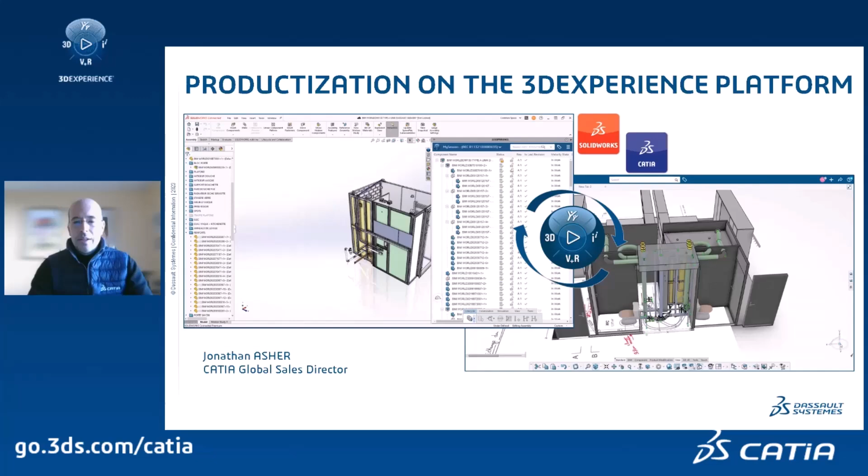And we're going to talk about CATIA and productization for the construction industry. A quick reminder, the pillars of our CATIA construction portfolio and offer are related to these four main subjects: being smart, being modular, being generative, being continuous. Continuous in terms of project development and level of detail, level of development. These pillars all lend themselves perfectly to the productization approach for construction.

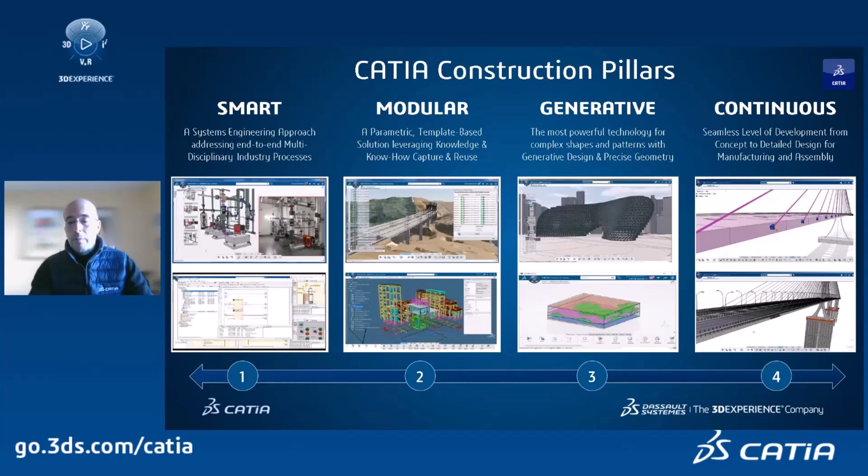And through the use of a systems engineering methodology and approach to construction, creating modular parametric templates that can be reused across projects, instantiating or integrating those modular components with the generative design technology and approach to design, engineering, and construction is a great way to then develop the model continuously over the course of the project through all phases. And they all are then deployed in this productization approach for construction.

And there's a difference between industrialization in construction, which has its roots more in the manufacturing industries, versus productization. When you look at industrialization in manufacturing, we think of automotive and aerospace, industrial equipment, where supply chain is an essential component to optimizing manufacturing. And when we optimize manufacturing, that's great for something like an automobile, where it's a standard assembly of custom components. Every component is fine-tuned and tailor-made to optimize the assembly of that product.

Well, a building is the opposite. A building is a custom assembly of standard components, where these standard components are not optimized for the final custom assembly that's going to be delivered for the construction project. So the modern approaches to industrialized manufacturing are difficult to apply to industrialized construction.

The two approaches just don't mix so well together, which is why productization as an approach to construction lends itself very well to this custom assembly of standard components, because you can take standard off-the-shelf components, you can integrate them into custom generative assemblies, and then build that final product, which is the finished construction, whether it's a building or an infrastructure project, using the same technological bricks that you would for industrialized manufacturing.

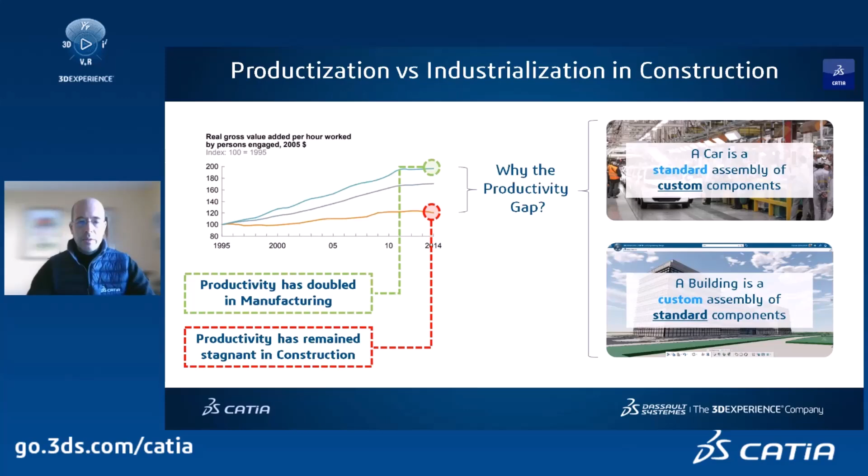So that's the key distinction between industrialized manufacturing versus productization in construction. They share many threads, but there are nuances between the two. And by deploying productization in construction, you can see those efficiency gains that are going to bring construction productivity, efficiencies and margins back up in line with the same types of gains that we've seen in the manufacturing industries since the Industrial Revolution.

What is productization then in construction for CATIA? From CATIA, we see it as a multi-layered approach to developing the 3D virtual construction twin. It starts with standard components that are digitized. Digitized, they're parametric, so they are flexible and able to adapt when a standard component is inserted into a model. From there, you build these parametric assemblies. Parametric assemblies integrate parametric standard components, and those parameters are nested into the parametric assemblies so that you can create another level of intelligence, flexibility, configurability into that component, into that module.

Next up, we have generative modular variants. This is when parametric assemblies are layered together and given a rule-based intelligence, rule-based decision-making inside of them, so that they can adapt, change or modify when they are integrated into the larger model. So the generative module variants are generative modules that can express themselves in different ways based on their configuration.

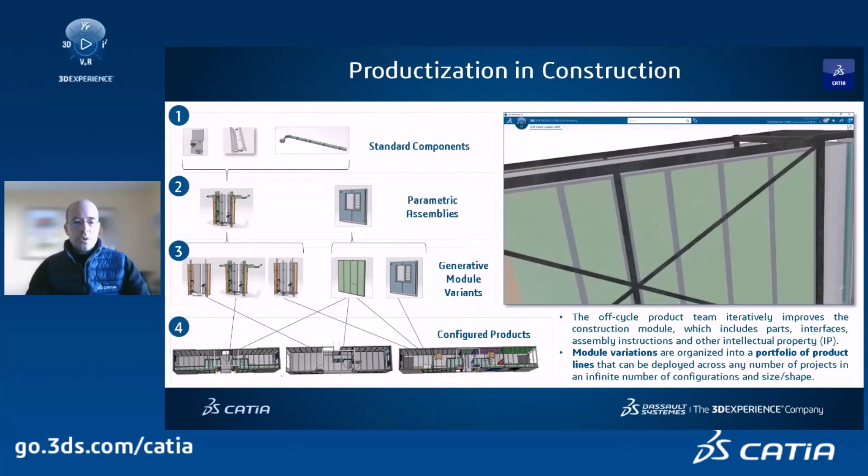Then they're configured into products. So you see, we're building up intelligence, we're layering information. And because all of these components are parametric and generative, they can be configured based on the unique requirements of a project into which they are deployed. So these configured products are essentially expressions of the generative module variants based on the specific project requirements. That's a quick look at productization in construction, what it means for us from CATIA on the 3D Experience platform.

CATIA is a part of the 3D Experience platform. We are one brand of many. Our sister brand, Solidworks, is widely used in the construction industry to develop products, standard components. Here we see an example of a door or a configurable bathroom pod. These are simple components and detailed parametric assemblies developed in SolidWorks that can be integrated into CATIA via the 3D Experience platform to create generative module variants and configured products.

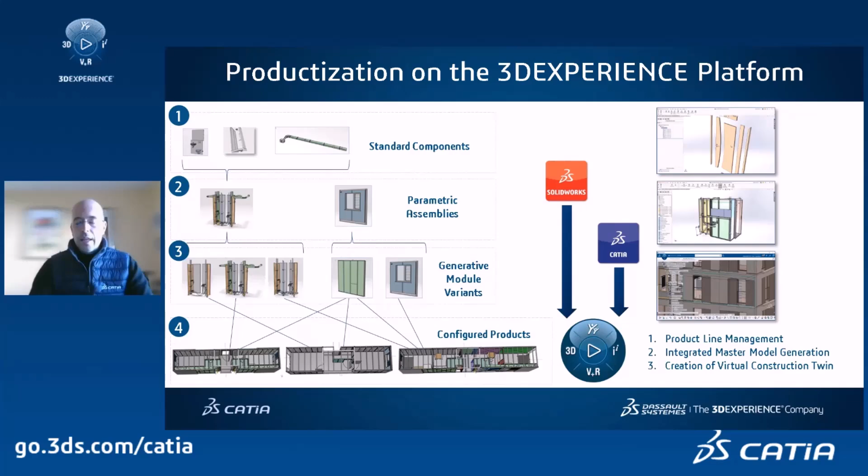And these configured products, when inserted into a larger project, create the construction twin, the virtual construction twin. So now let's look at how that looks in reality. This is an example where we'll launch the project with new SolidWorks connected.

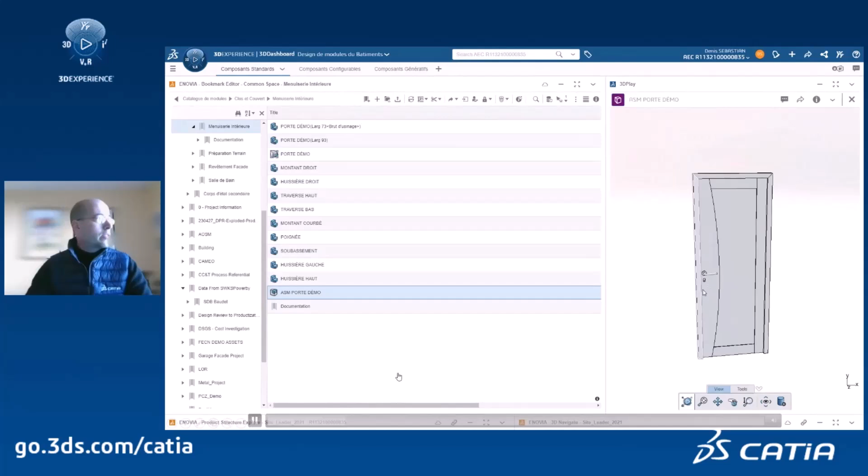You can launch SolidWorks connected to the 3D Experience platform and access all of your SolidWorks models from the platform. You can open them up in SolidWorks desktop. Well, here we're reviewing it in 3D Play to look at the overall assembly. But that model can be opened directly in SolidWorks, where you can make modifications to this standard component.

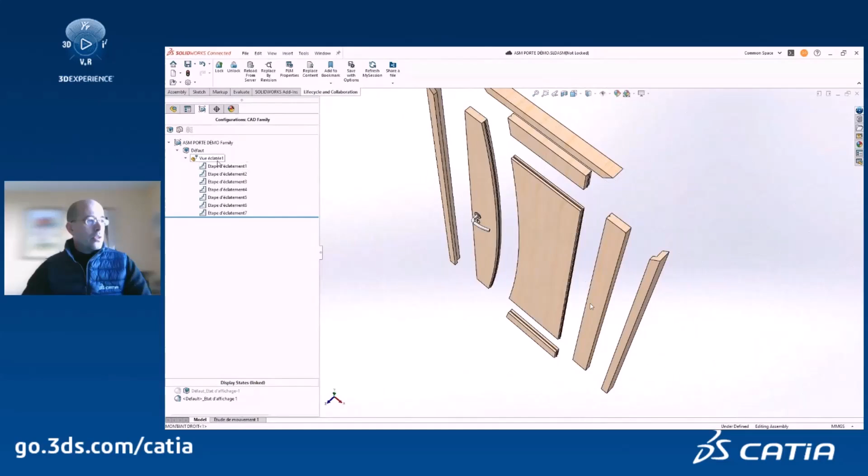This modification, if you want to change the door panel curve or change the door handle or change some of the design lines or some of the manufacturing information with the notches or the cutouts or grooves, you can do that all in SolidWorks. As we see here, this SolidWorks model is saved to the 3D Experience platform.

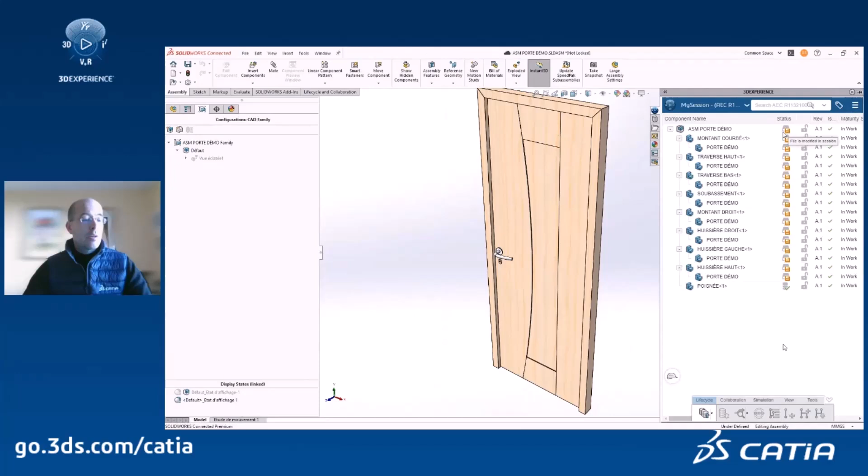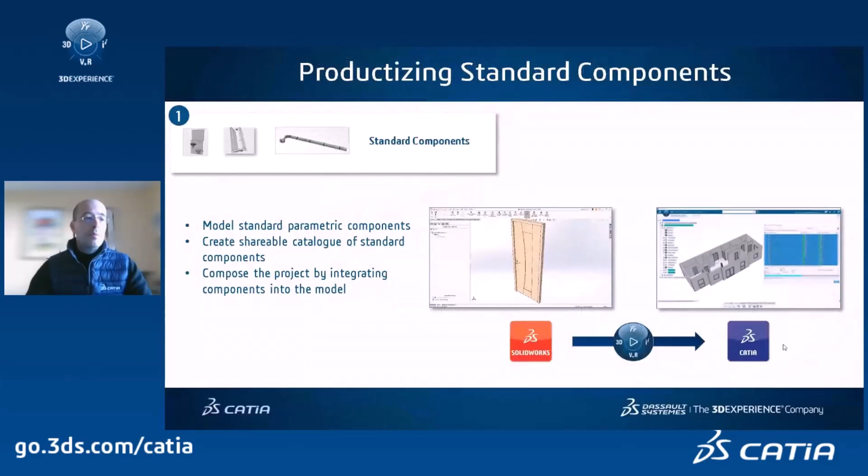And because it's saved to the 3D Experience platform, it's available to designers downstream, to CATIA users downstream who want to integrate this standard component into their parametric assemblies or generative modules. Here you see the saving of the SolidWorks model to the 3D Experience platform. It's connected directly to the same common data environment that we're going to be using in CATIA on the next step.

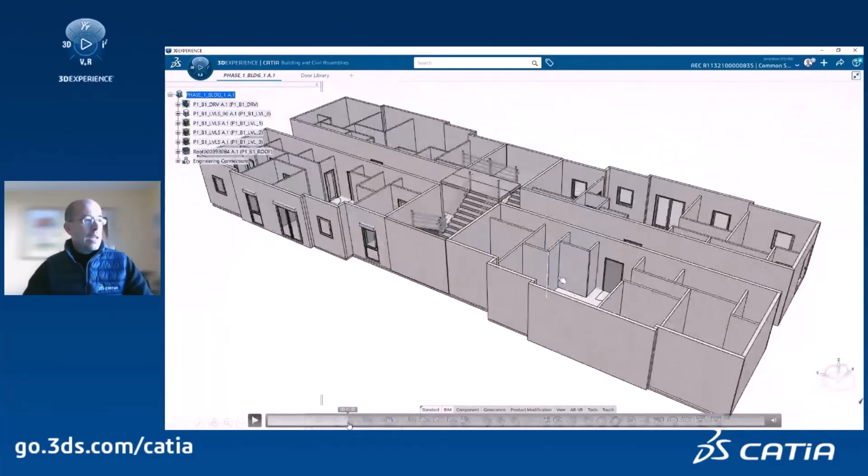So now we're working on a larger project in CATIA, to develop this new urban development in a particular city. We want to integrate those door modules, those standard components, into our larger project assembly. We've got a couple of examples here where we have the exact model that we just saw modeled in SolidWorks. We've got a couple of other doors that have been modeled in SolidWorks, and we want to create those as reusable parametric templates.

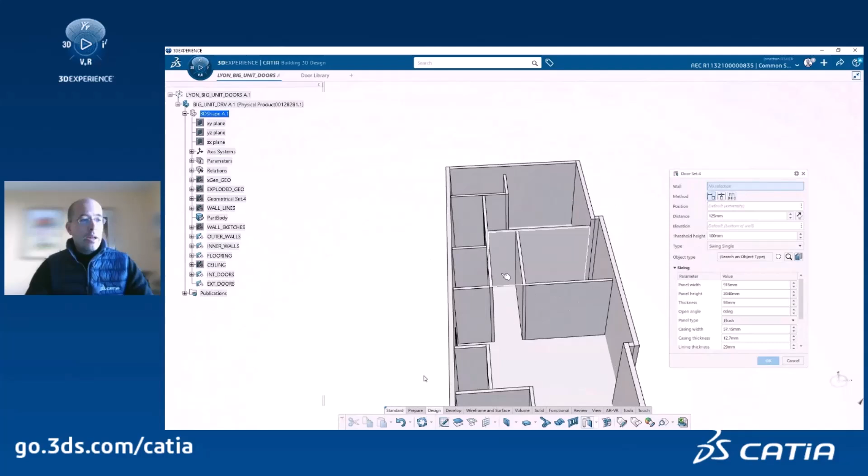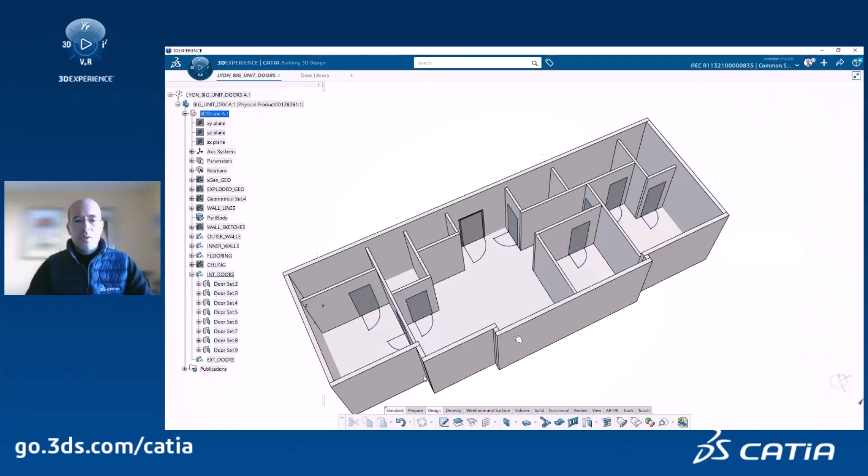What you see here is we've taken that object type, we have a low level of detail, a pad, a volumetric rectangle representing the low LOD door inside the object type, and then we have, as a second step, the high level of detail SolidWorks model included as an engineering template, which is instantiated automatically when we run the change LOD command. So change LOD is going to take the engineering template and automatically instantiate that engineering template into our model.

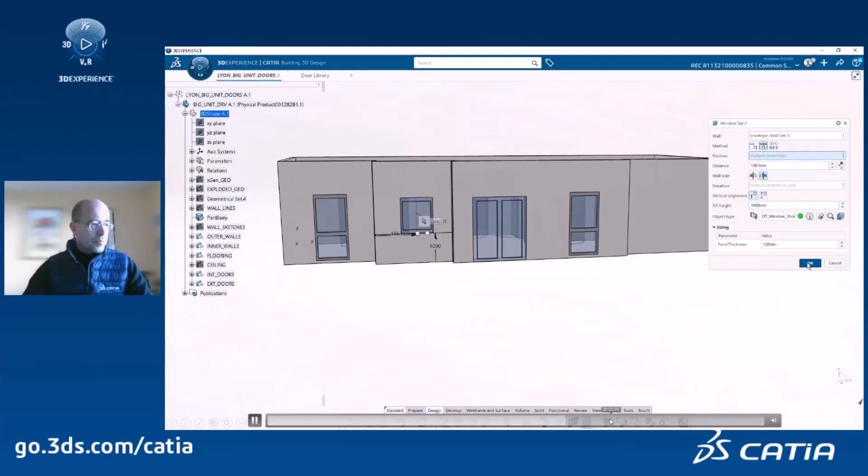And I'll skip ahead to see what that looks like, because here we're inserting a couple of low LOD doors, low LOD windows into our 3D model. And now when we launch the change LOD command, it brings up the dialog box. We select which doors or windows we want to instantiate from the object types. In this case, we're selecting all of them.

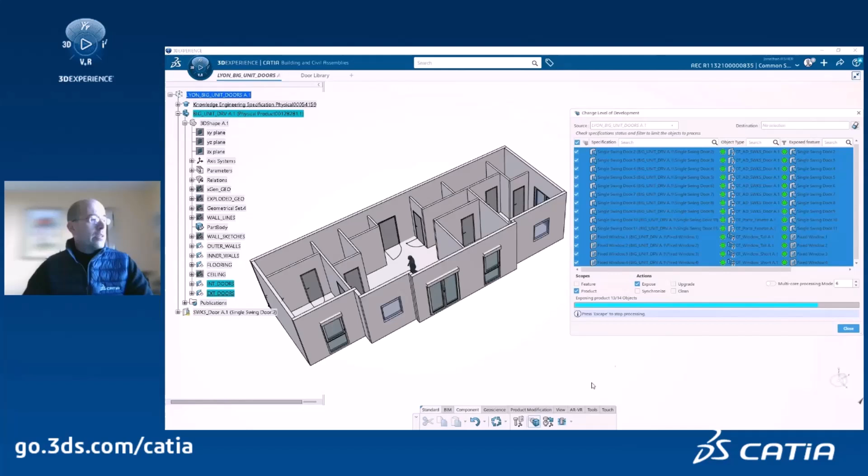And after CATIA processes all of these engineering templates, you can see them popping up into the model now. We can navigate around and see those different standard components that have been inserted into the model. It's a simple, very straightforward example. And yet it's a very powerful example to show how these different standard components can be easily inserted into your model. And that's the productization approach.

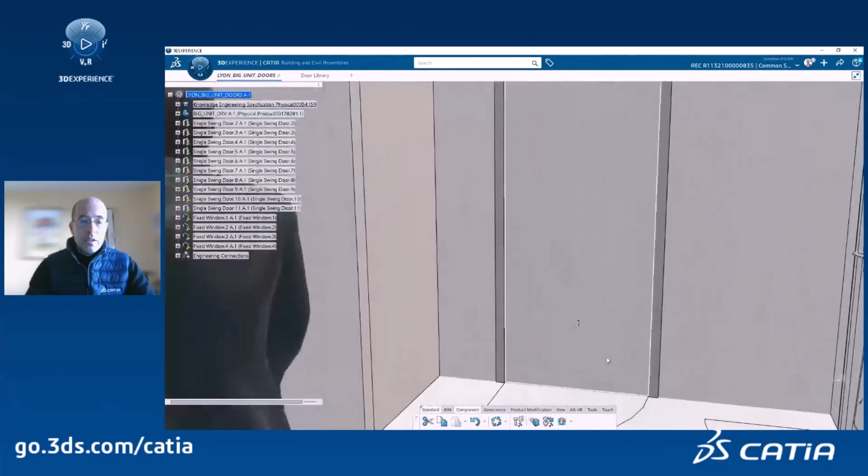Okay. Now I'm going a bit too slow here. I'm going to speed it up.

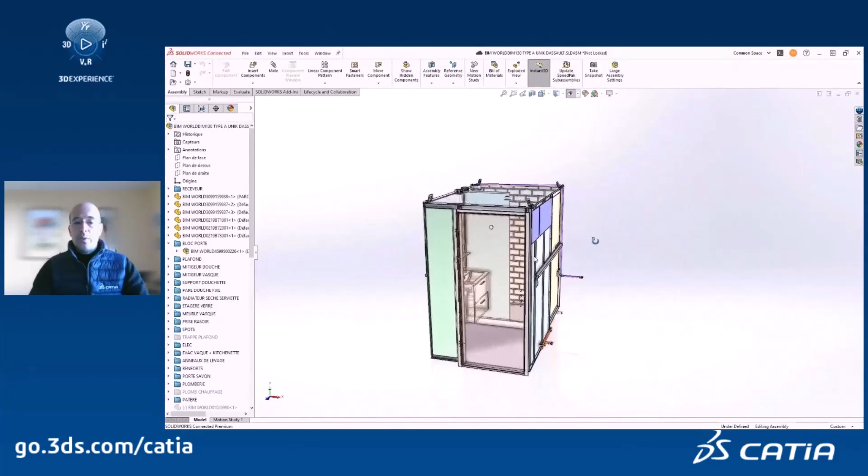Here's another example of an assembly, a bathroom pod assembly in SolidWorks. This bathroom pod has a couple of different configurations. So within SolidWorks, we've configured the bathroom pod in 4 or 5 different ways so that the piping and electrical outlets and all of that changes based on the configuration. The configuration can be a dimensional configuration or a different component integration configuration, and that's going to lead to different interfaces.

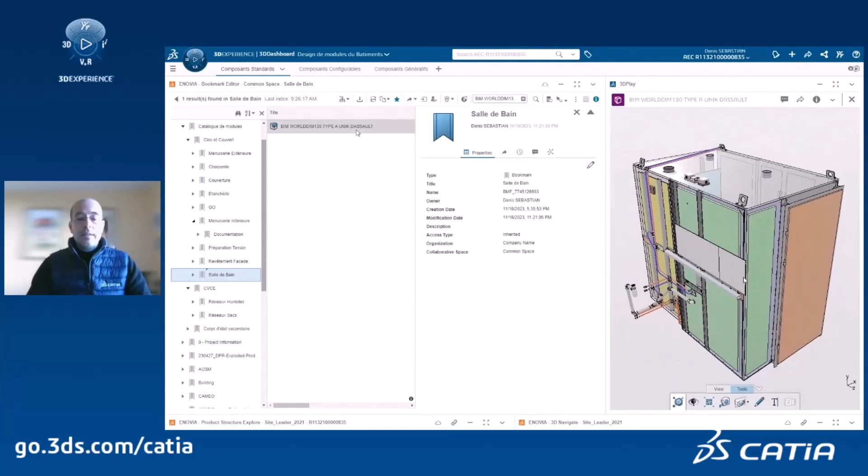The bathroom pod here has interfaces to electrical and interfaces to the hot water, cold water, and drainage. This bathroom pod, again, is configurable, so changing the configurations is going to change the overall 3D assembly, and it's, again, connected to the 3D Experience platform. That data is available on the web. Here we're navigating the different parameters on our dashboard, and that assembly can be integrated into our CATIA assembly.

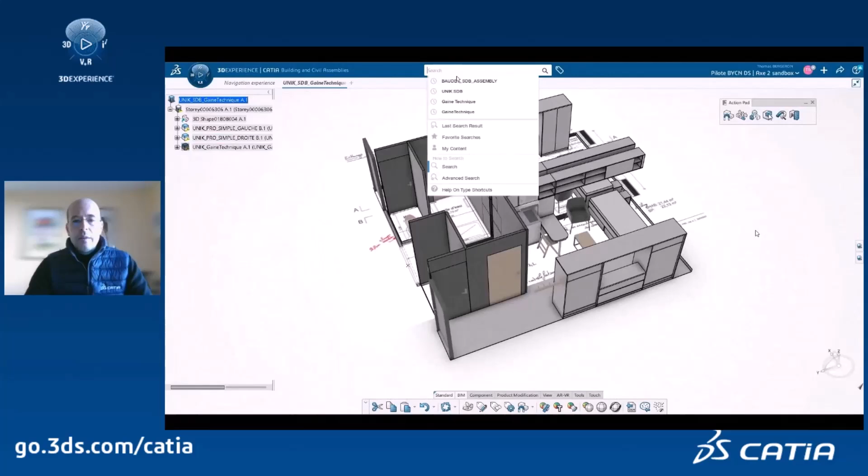So here, because we're on a common data environment, that is the 3D Experience platform, the SolidWorks assembly can be searched for from within our CATIA modeling environment, inserted into our 3D model, and positioned as if it were a regular CATIA assembly. That's the exact same model that we had. We can position it inside our larger assembly with a simple drag and drop.

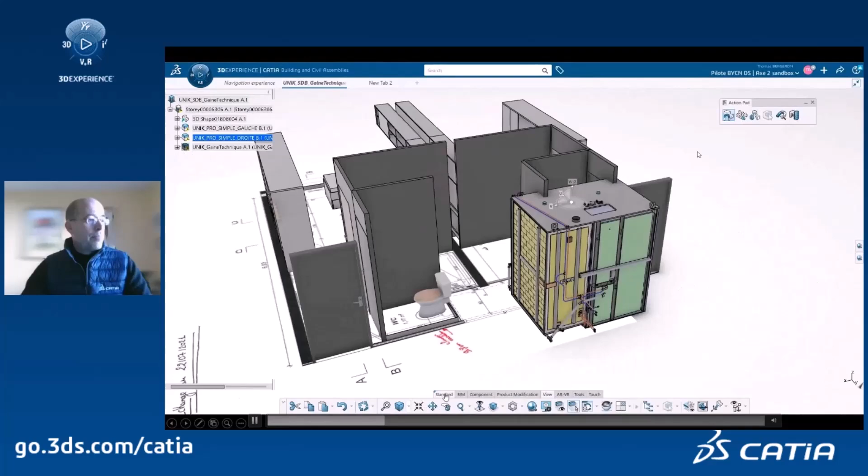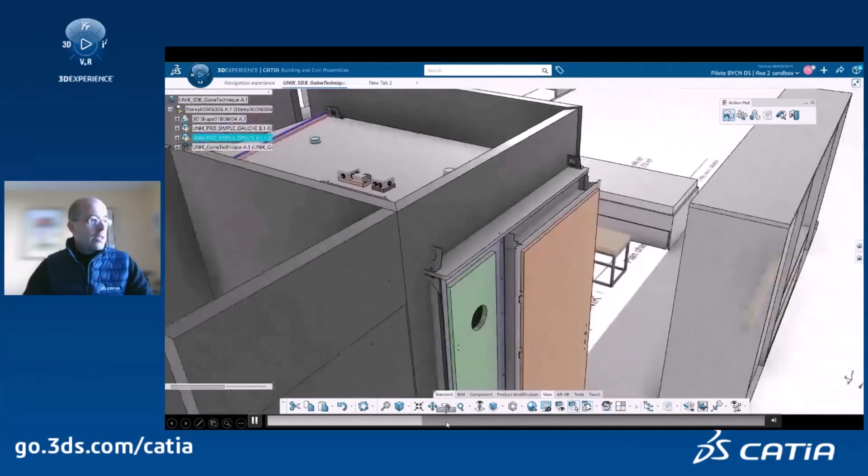We can grab it, we can move it around, we can snap it into place, or we can create engineering connections to make sure that it's parametrically connected to the axis systems that we've defined within the skeleton of our CATIA model. And now what's really incredible is, because we need to connect this model via the interfaces to our CATIA model, we can start to connect these two components, one and the other, with the two assemblies, the SolidWorks assembly with our CATIA assembly.

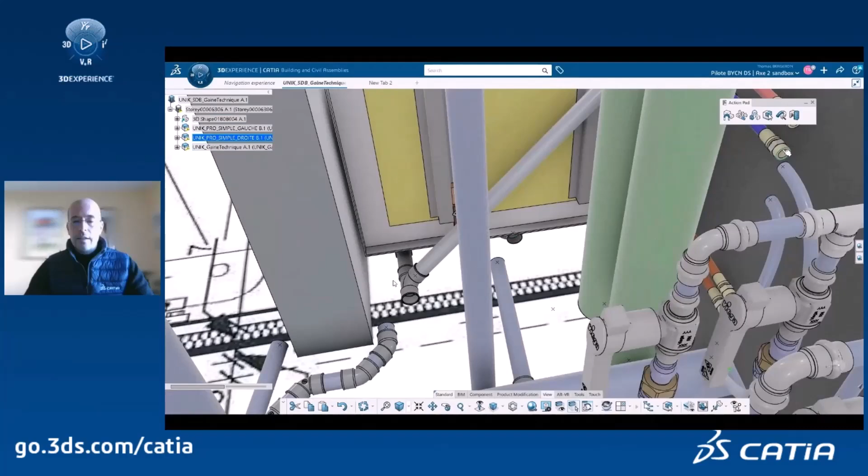We already have the riser stack in this 3D model. Let's see if we can find it here. This is a riser stack that was modeled in CATIA in the global context of the project. And now we need to link the interfaces, link the riser stack interfaces to the SolidWorks assembly interfaces. The SolidWorks assembly interfaces, well, those are static because they've come from SolidWorks. And they'll change if we go back into SolidWorks and we change the configuration. Those interface points could change.

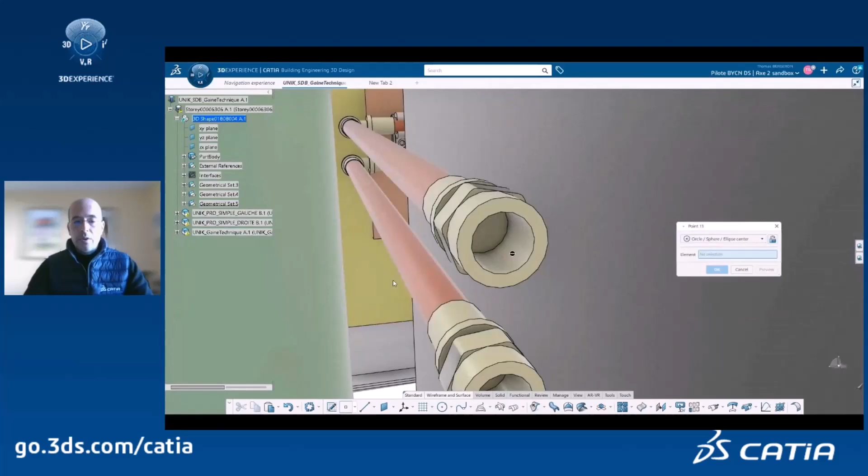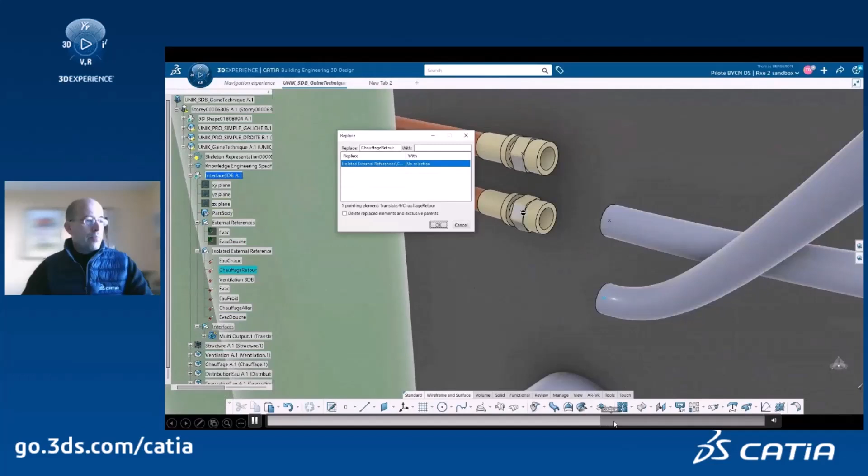Our CATIA riser stack assembly, this is a parametric assembly that's going to update live in CATIA. So when we connect the two interfaces between the interface to the SolidWorks assembly and the interface to the CATIA assembly, and we run an update, we should get everything to update. So here we're running the update, and you'll see it was quick, but the CATIA interfaces updated automatically to the SolidWorks interfaces. So it's a way to connect the two types of models together into one construction twin.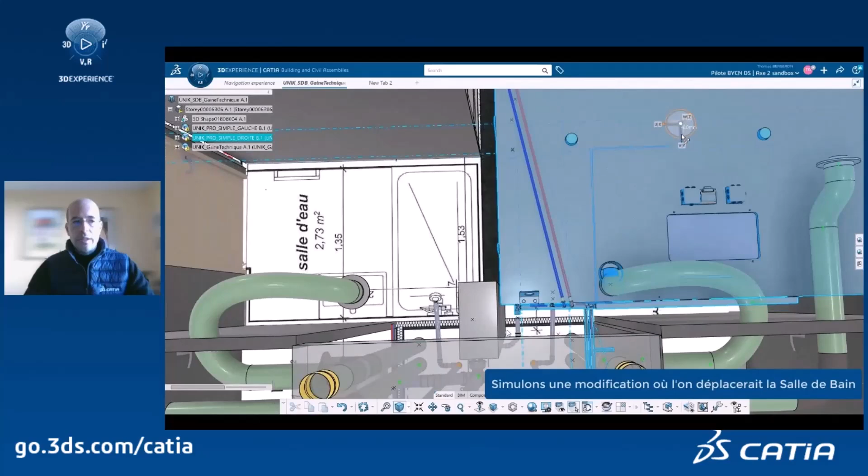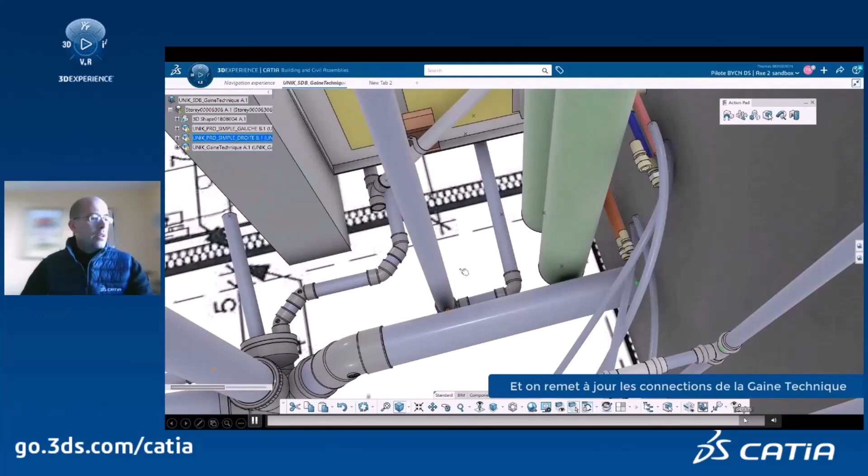And now if we need to move that assembly for whatever reason, because this is parametric, in this case, we're going to move the SolidWorks assembly a little bit. We're going to run an update, and all of those components are going to update for us. Like magic. Let's run an update. And everything's reconnected. So that's an example of taking it to the next level, productizing your model with parametric assemblies.

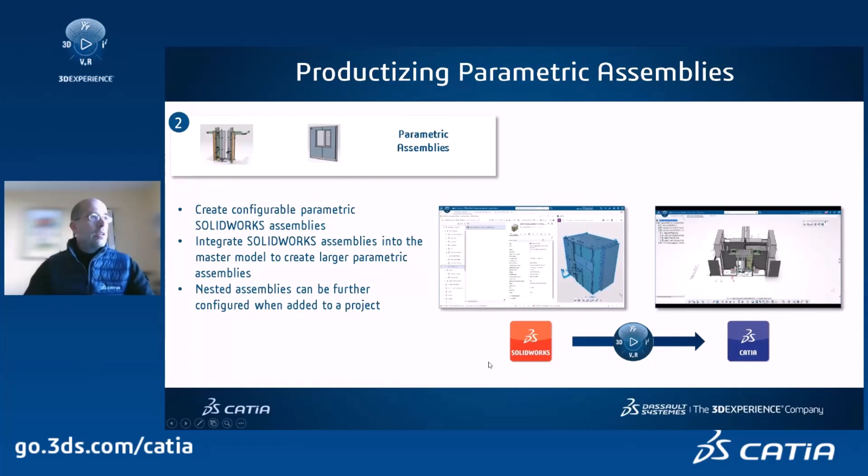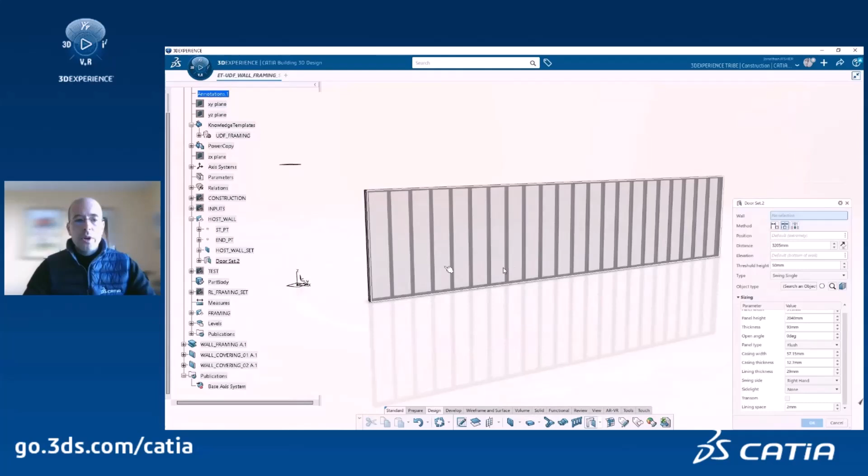Now let's get into generative module variants. Okay, so this is really exciting because in CATIA, you can do really incredible generative modeling. So in this case, we've got a couple of examples of a generative module assembly in CATIA. This one has been developed to incorporate framing of a wall. So we've got structural wood framing that's happening, and it adapts, and it's parametric, and it's generative in the sense that as you add doors, as you add windows, as you add different features or different components inside this wall, all of the framing is going to automatically update.

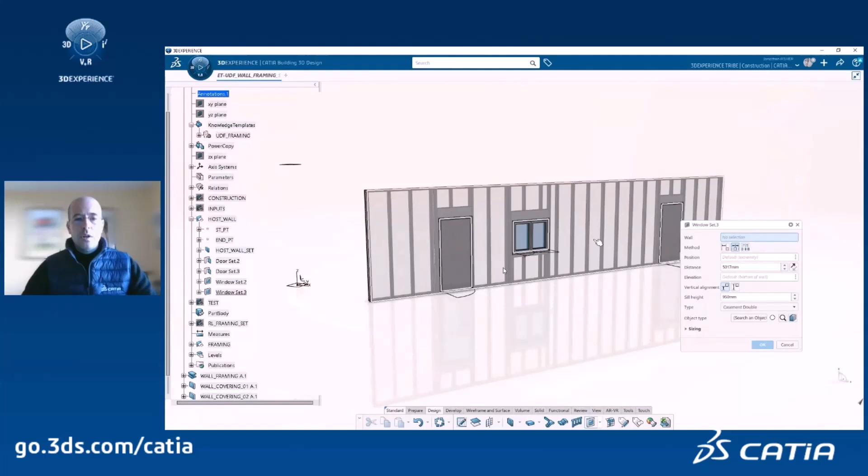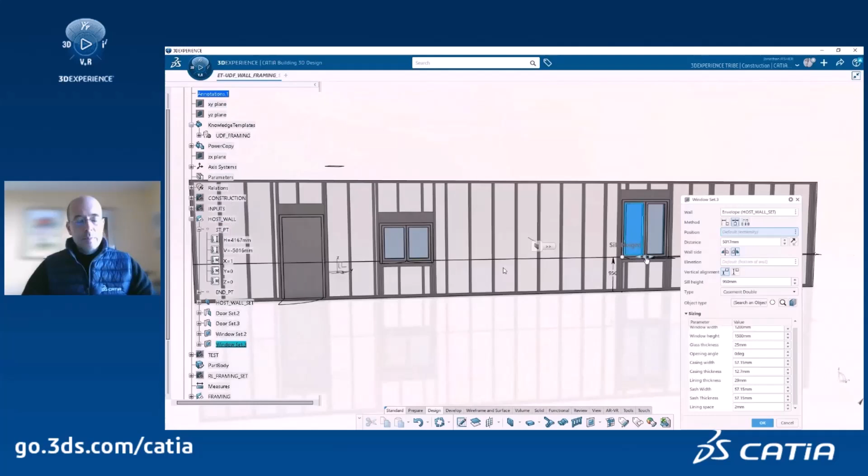It's rule-based, so the framing conventions and framing rules have been integrated into this component so that you know whenever you add a component to this wall, you're going to get code compliant framing updating within your model. And it's parametric, so if you need to change any of those parameters based on the location or the country within which you're going to be using or deploying this wall, that's all integrated.

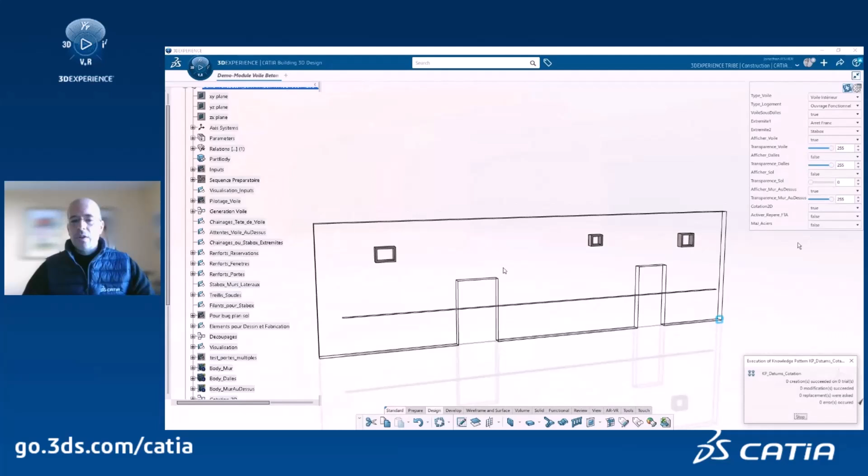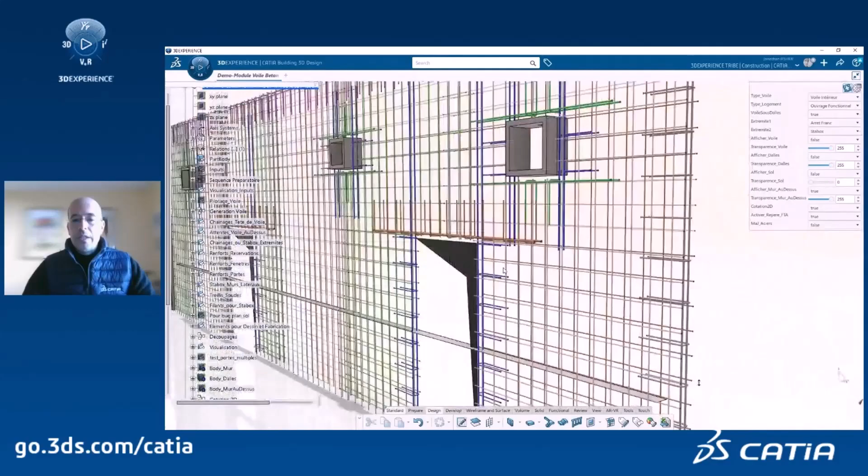Here's another example of a highly detailed rebar assembly that's being built based on a volumetric input. So the input to this generative module assembly is a volume, and any adjacent volumes that need to be taken into account for rebar coordination between, say, the slab above, the slab below, adjacent walls. And what it's going to do with this generative module assembly is create all of the very detailed rebar that needs to be manufactured for this wall, the blockouts for the openings, any special fittings that need to go into, create the manufacturing information, and the drawings.

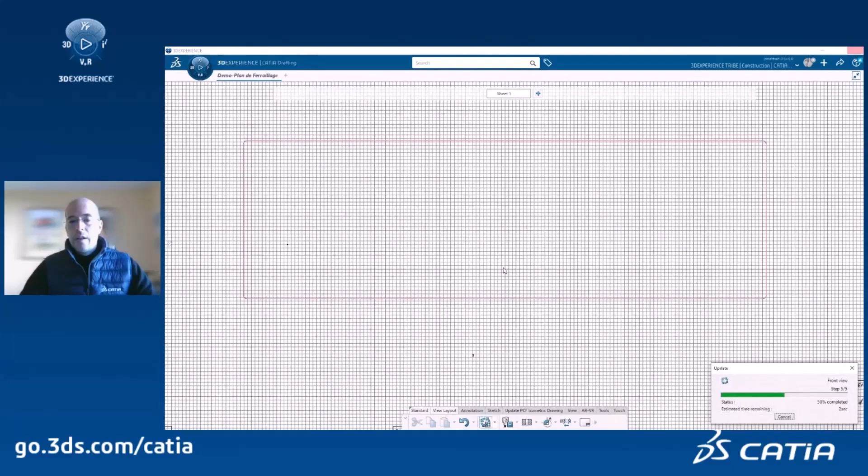The drawings that include the layout drawings, the assembly drawings, the site drawings, all of that comes with this template, which is incredible to have that integrated into one place.

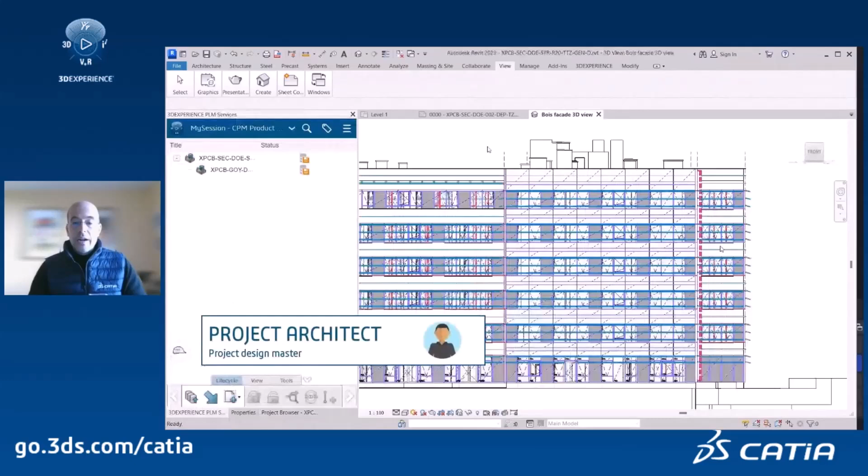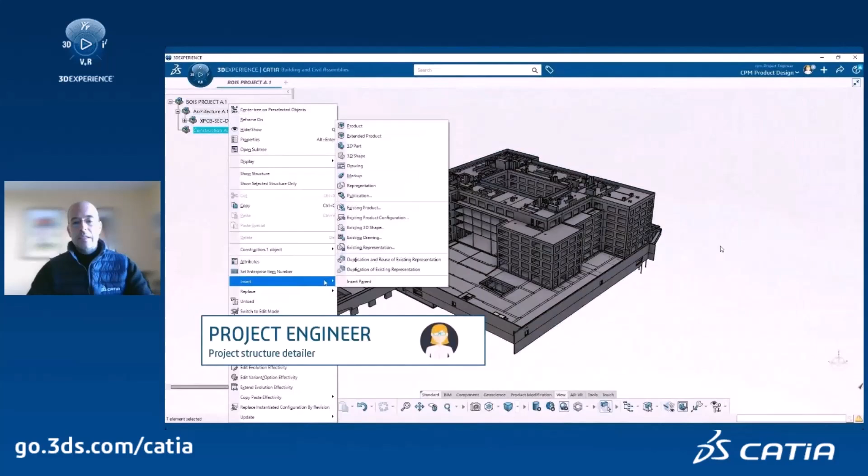And now, new in 24x CATIA 3DEXPERIENCE on the cloud, we have a Revit Power By option. So in this case, I'm a general contractor. I'm receiving models from my architect. My architect is giving me Revit models, but they're connected to my 3DEXPERIENCE platform. So they're saving their Revit model to 3DEXPERIENCE, and I'm going to open that Revit model in CATIA without conversion, without any issues. I can open that model and directly consume the geometry from Revit to bring it to the next level of detail.

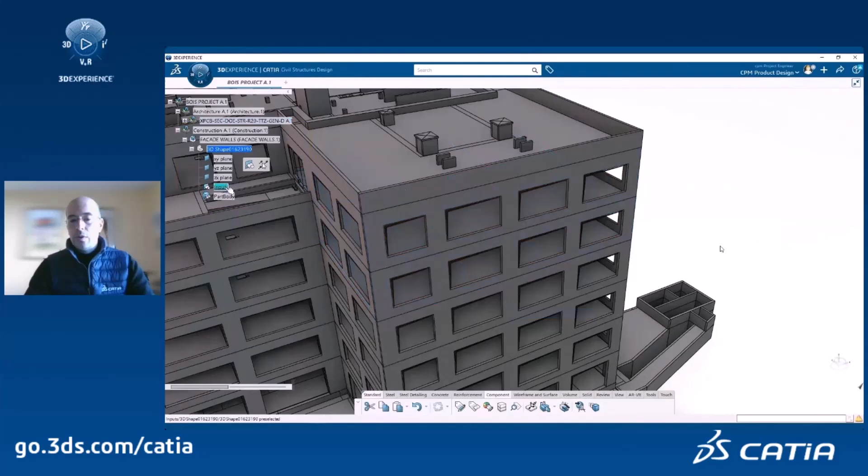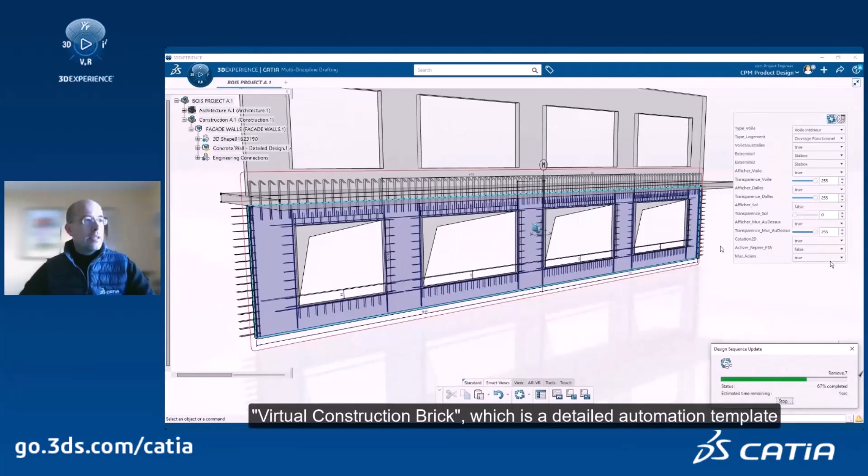Now, in this case, I have a wall that I need to pour as concrete. In order to generate that concrete wall, I'm going to instantiate that generative module assembly, that rebar template that we just saw in the previous video. It's very easy and straightforward. I select the wall volume from Revit, I instantiate my template, I run an update, and I get all of the geometry, all of the drawings, all of the manufacturing from that template updated for this model. Now let's say there's a design change that needs to happen. We need to change the opening size for this wall.

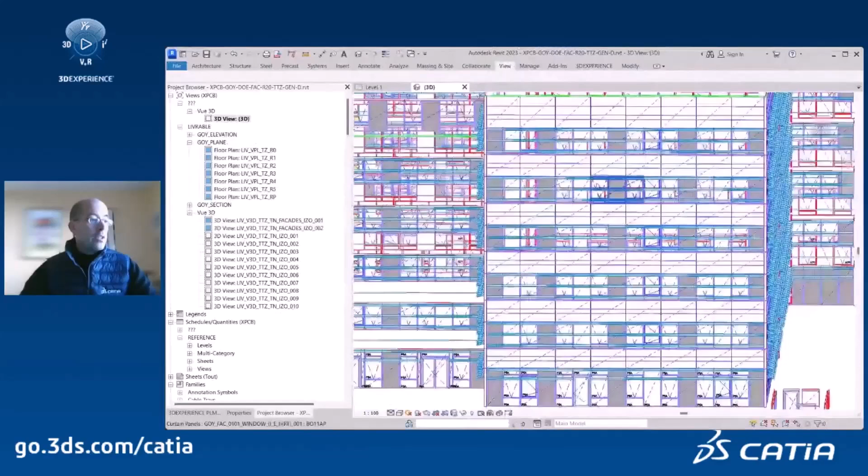I make a request via the platform to my architect to change the size of the window, create an issue, he or she receives a notification. Back in Revit, the change is made. Back in CATIA, once that change has been made and saved to the platform, I update my model and everything automatically updates. The rebar updates, the drawings update, everything.

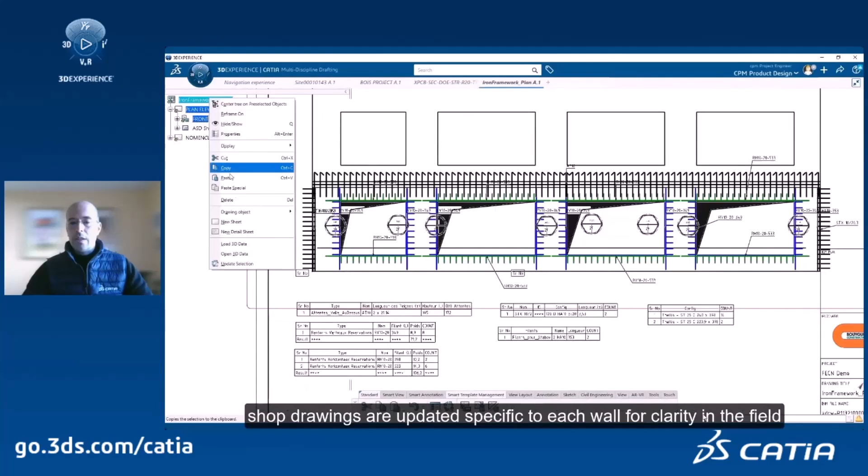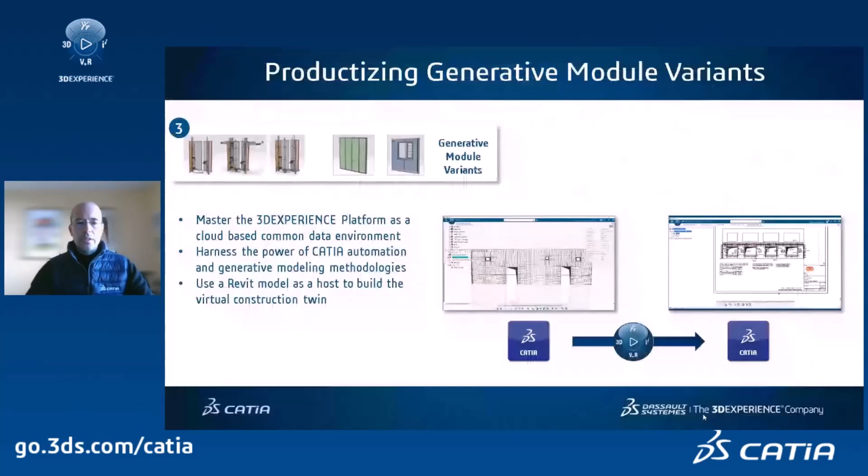So no rework. There's a direct parametric link between the Revit model that's saved to the platform and the CATIA model that's automatically generating all my construction details. It's a fantastic and exceptionally powerful workflow that will absolutely be a game changer in the industry. Finally, now that's the CATIA option.

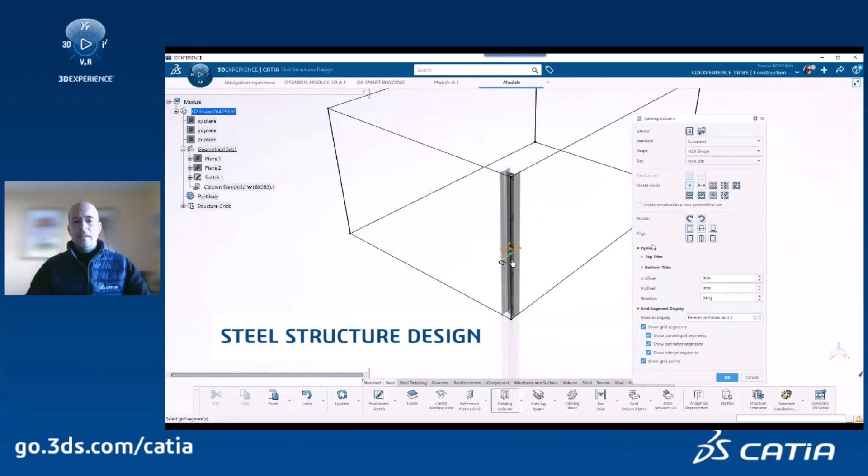The last video I want to talk to you about in productization are these configured products, because when you bring this all together, you can make some beautifully detailed and highly parametric, highly generative models that are project specific and put together based on project requirements.

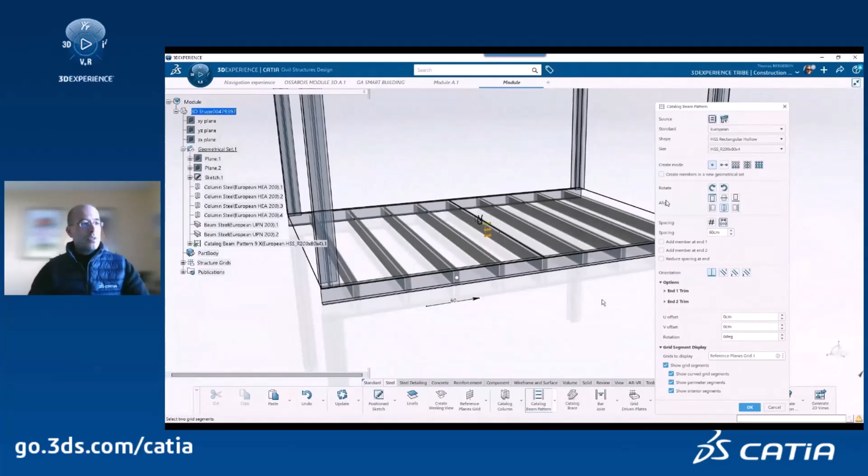So again, I mentioned at the very beginning that we have all of this really wonderful functionality that has been developed for structures, for systems, for architectural design. Here's an example where you see that all coming together. This is the civil structures design application where we're placing columns and beams and slabs and plates. All of that very simple to use out of the box.

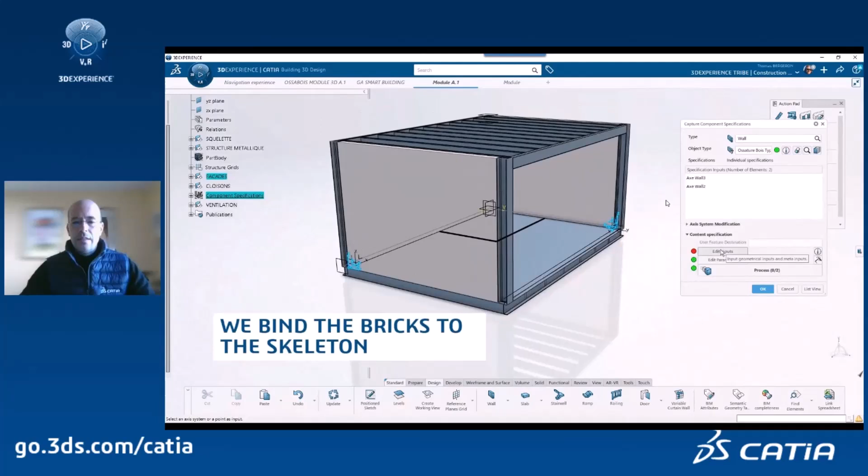Now we're going to go into the building 3D design application, add some walls, add some doors, add some windows, add those architectural elements, simple, easy. We're also going to insert our generative module assemblies. So here we've got a couple of templates that do the wood framing, as I mentioned earlier. We've got another one for partition walls to insert partition walls.

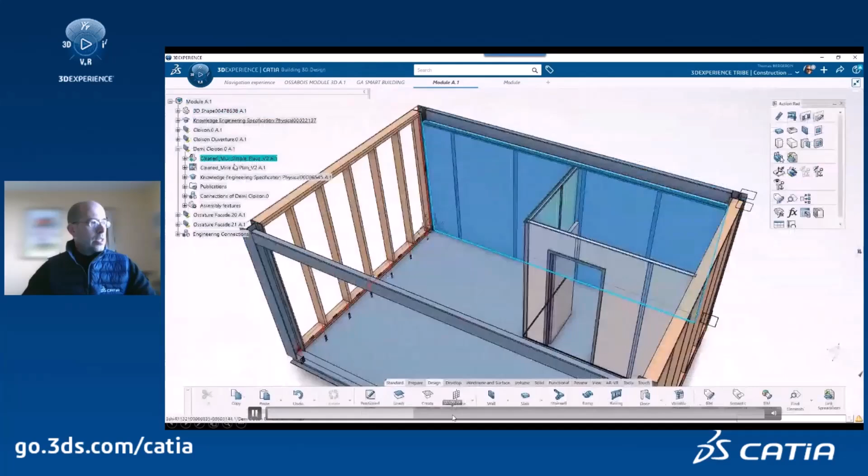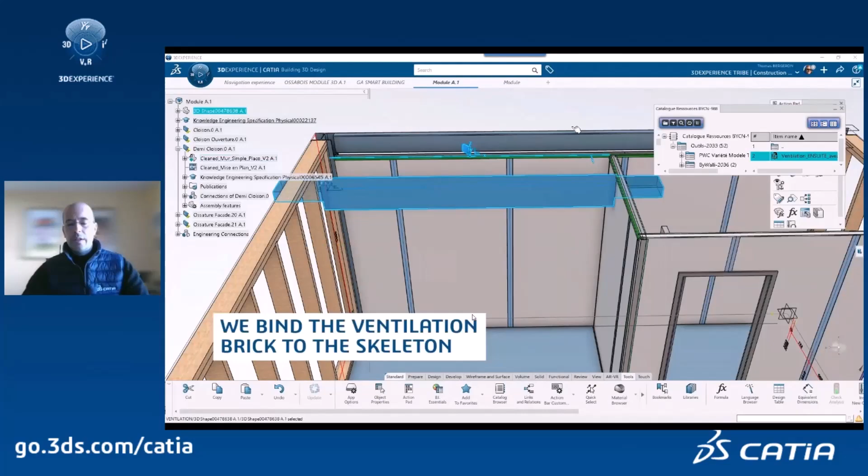I'm going to skip forward a little bit. You've seen the automation magic happen already, so you don't need to see it again. There's our wall. What do our walls contain? They contain the drawing information that you need with the different components. So you've got the insulation, you've got the panel layout, you've got the framing layout. All of that comes along when you insert that template, and it adapts to the local condition. It adapts to the configuration required for the assembly.

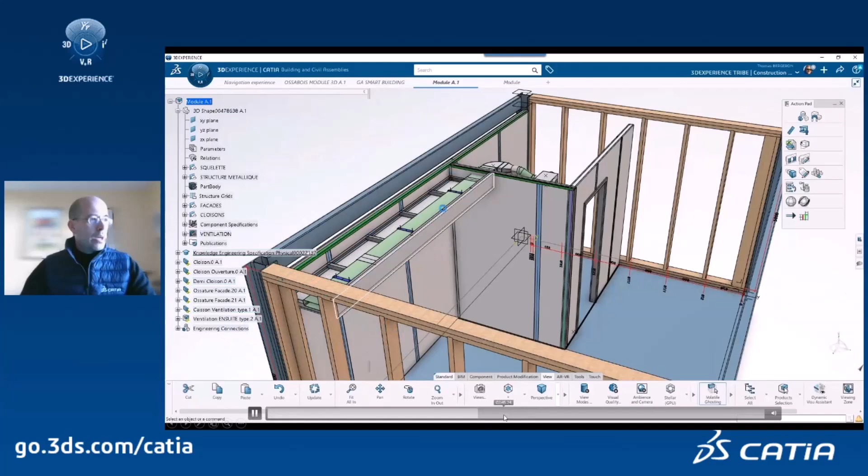You can insert components for the ventilation system, for the HVAC system, you saw the riser in a previous example. All of that, once you've done it once, is reusable across all projects, any projects. And so we're going to add in the ventilation system to this module. Let's say you need to add some doors. You saw doors in another video.

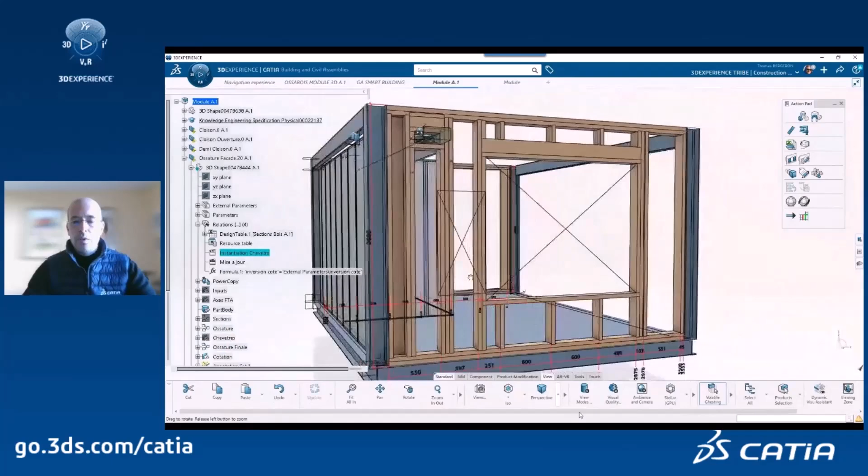Here we're going to grab a door, we're going to place it, and you're going to see that with the magic of these parametric module assemblies, you run an update, and all of the framing requirements are going to update, all of the framing information, geometry, drawings, all of that updates because it's been integrated into the creation of this parametric module assembly. And again, we've got the dimensions, we've got the annotations. This is the 3D master approach where the 3D model is the documentation for construction.

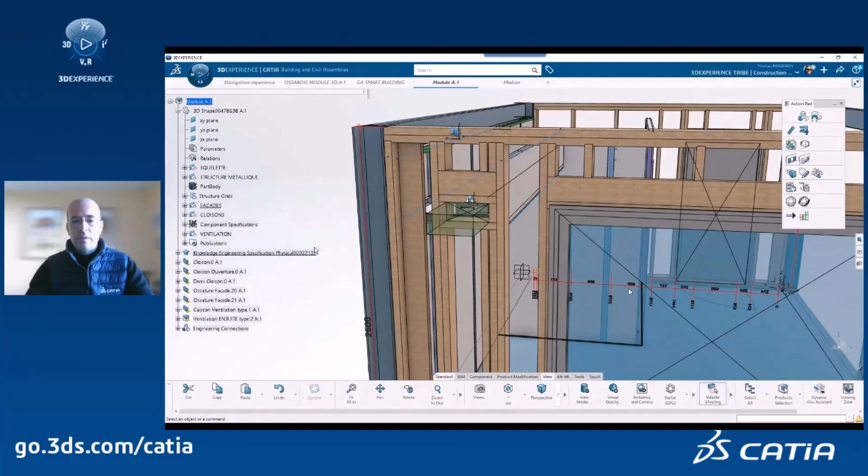Yes, you get the drawings. Yes, you get the manufacturing data to run all of your digital manufacturing equipment in your shop and your facilities. But the 3D model also is there as a check. All the dimensions are there so that you can check it and validate that everything works.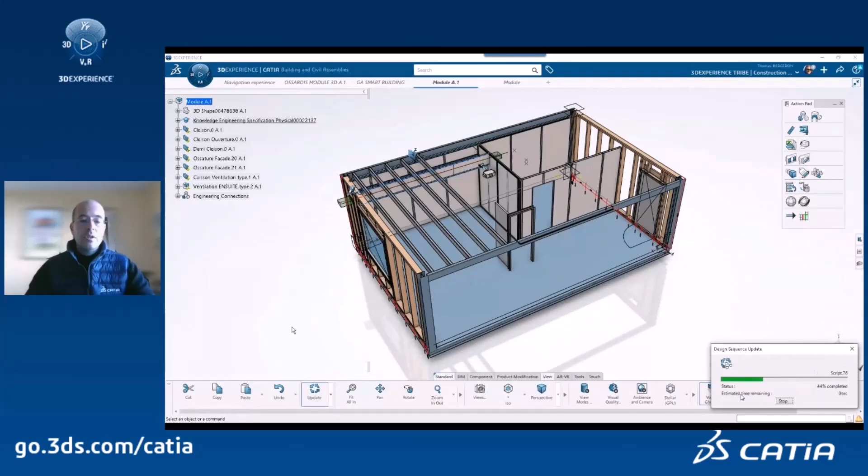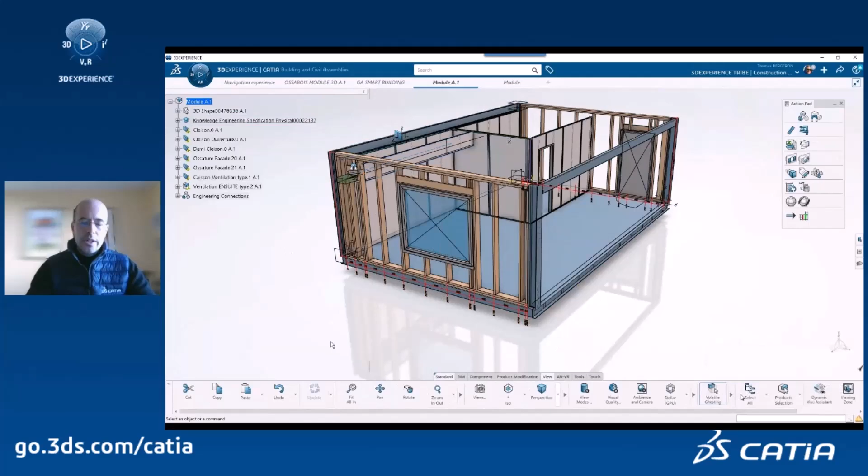And it's parametric. So when you make the change, you change the dimension of this unit, you change the size, because you're going to deploy it in a different project, or you're going to deploy it in one dimensional configuration in one area of the building and another dimensional configuration in a different area of the building. You change the dimensions, you run an update, and everything's going to reconfigure itself because you've integrated these generative module assemblies to create your configured products for this specific project.

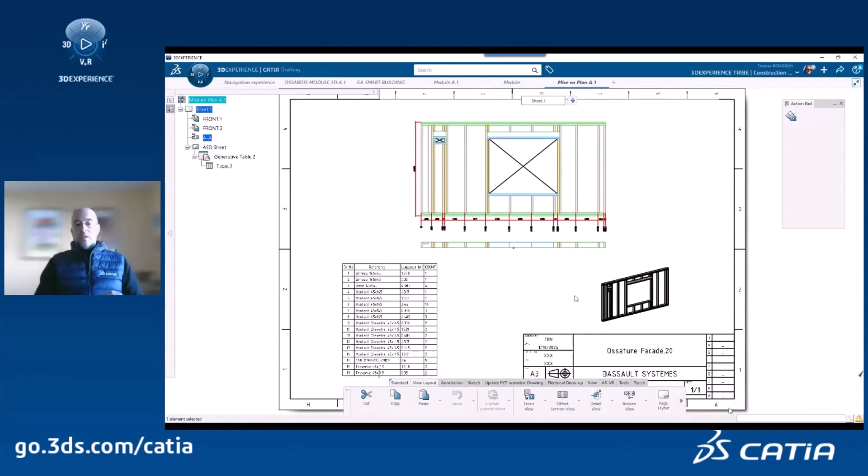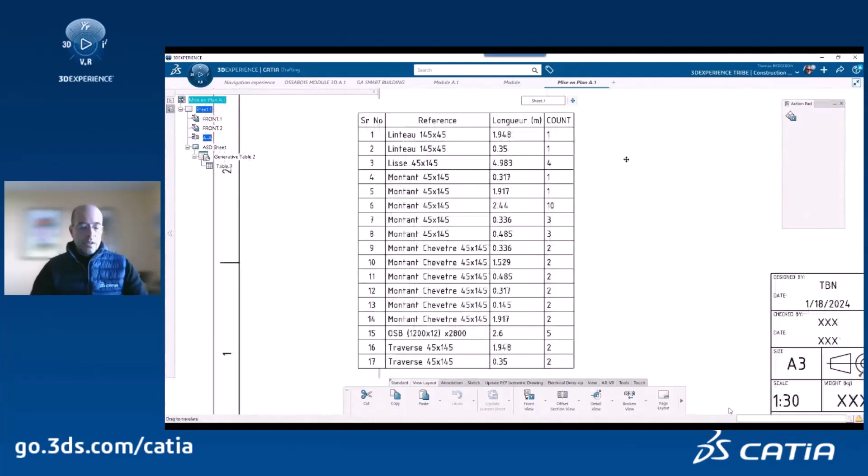So that's a rough overview of productization in construction, using CATIA, SolidWorks, Revit on the 3D Experience platform. The 3D Experience platform being that common data environment that brings everything together. Project management, the 3D modeling, building information modeling, product lifecycle management, building lifecycle management.

It's all integrated here into one place where a project can be developed from an architectural design standpoint, pass through all of those phases of design, development, construction documentation, and go straight into the productization for construction phase, where these configurable products that integrate all of the different layers of componentry that we saw are integrated into the modules to build that virtual construction twin.